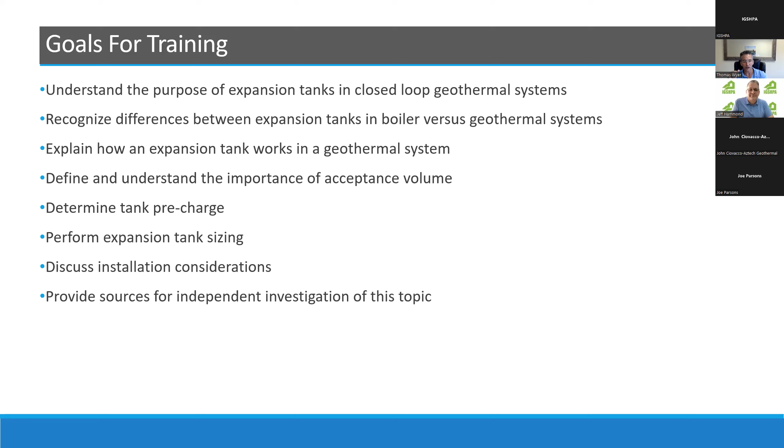So what I'm going to cover today is hopefully everything you would want to know about expansion tanks for use specifically in closed loop geothermal systems. I'm going to focus on diaphragm tanks. Also, you can consider bladder tanks as part of that category. I'm not going to talk about compression tanks that have an open air water interface. I'm going to talk about how to size these tanks, how they work in a geothermal system, and where you install them in a system. So pretty much everything that you could consider for expansion tanks. The last thing I want to do is also provide sources for you to investigate this topic for yourself.

In fact, the very first slide I put in here is the references that I've used in my research, both in creating the white paper itself and also in preparing for this presentation. A lot of these will be very familiar to you: the ASHRAE handbooks, the CSA IGSHPA standard C448, the Plastic Pipe Institute's excellent book on polyethylene pipe. If you're into any kind of hydronic heating, I would suggest Siegenthaler's book on modern hydronic heating. There's an excellent article that I'll reference in the presentation on understanding expansion tanks. It's an ASHRAE publication from 2003, authored by Taylor.

And again, I'm using some information that we wrote in our white paper, and I put a link in the presentation, so you can go back later on if you haven't read that paper and compare it to what I'm talking about today. Now, we created that paper many years ago, and as with anything else, when you continue learning and reading and doing further research, you look back at things you may have done earlier in your career and say, gosh, if I could explain that a little differently, I'd change this word, I may exclude this sentence. But I think that if you take a look at the white paper and also pay attention to the presentation today, and maybe go back and follow through the presentation on your own time, I think IGSHPA always makes these available for everyone offline after the presentation, and I can include a link on our website as well. If you compare that information, I think you'll get a pretty good overview of expansion tanks in geo.

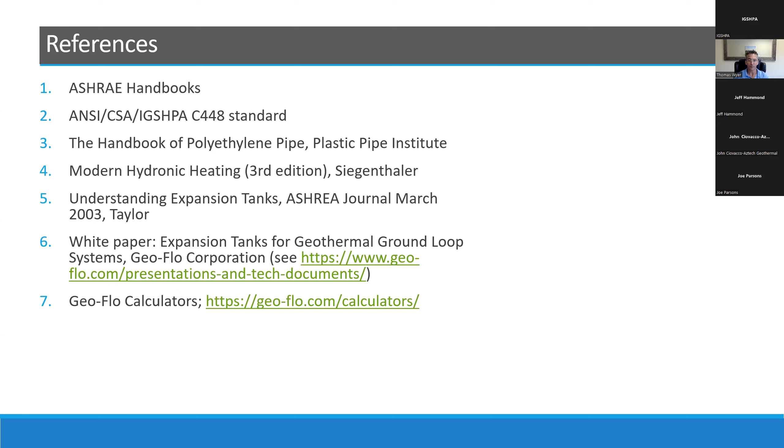And finally, I reference calculators, and as Jeff mentioned, full disclosure, I do work for Geo-Flo Corporation. We produce these calculators and we manufacture some products for this industry, so that's full disclosure on that. However, you won't see any product advertising during the presentation. This is purely a technical presentation. You'll see that very shortly.

So why do we use an expansion tank in geothermal systems in the first place? If you have been in this industry and done installations and service on geothermal systems, you'll know that the system pressure varies from season to season.

In fact, it has the highest pressure in the winter and the lowest pressure in the summer, typically. The reason for that is that the HDPE pipe itself expands and contracts at a higher rate than the fluid itself. So as water warms, it expands, and as it cools, it contracts. And HDPE pipe does just the opposite. As it warms up, it expands. It doesn't do the opposite. It expands more quickly than the fluid itself, and it contracts more quickly than the fluid itself. So that creates a situation where we see these pressures varying over the seasons and having high pressure in the winter and the lowest in the summer.

The other thing that we have to keep in mind is the HDPE pipe itself has viscoelastic and stress relaxation properties. So basically what viscoelastic means is that it functions kind of like taffy. So it has viscous properties and elastic properties. And like taffy, if you stretch it, it kind of pulls back a little bit, but it doesn't snap all the way back. That's the way HDPE pipe is. And stress relaxation basically means that the stress developed in the material degrades over time. So given enough time, the stress level approaches an equilibrium state. So those two properties of the pipe itself lead to a decrease in system pressure over time.

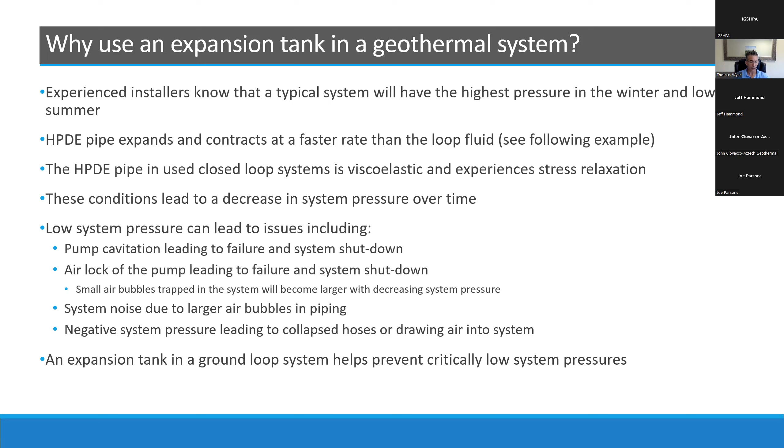So we could actually take a look at this concept of the pipe expanding more than the volume. And what I've done here is included some formulas. I'm not going to go through every single variable, but I want to point out a few things. One, we're assuming that the volumetric change of the pipe with these formulas, the pipe itself is unrestrained, which means that there's nothing holding the pipe in place.

That leads to a conservative estimate of the linear expansion and the diameter expansion, the volumetric expansion of the pipe itself. Now, if you read into the Plastic Pipe Institute, what they say about the linear expansion of pipe, that the actual value is much less than theoretical value. And they suggest that field experience shows that it may be even up to half. But they indicate, as well as most engineers that you work with, you have to still design toward the unrestrained condition because that's the most conservative case. That's the most conservative estimate of the changing length, diameter, and therefore volume of the pipe.

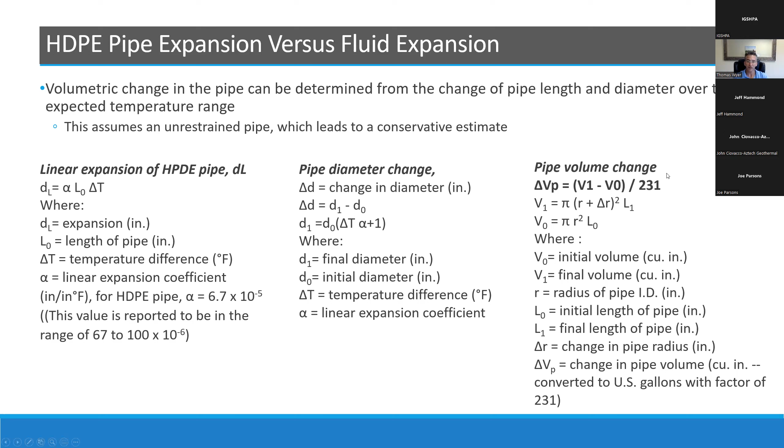So you can use these formulas to figure out the increase in volume of the pipe. And you can compare that to the volumetric change in the fluid. This is one expression or one formula that you can use for finding the change of volume of a particular fluid.

It gives you the values here. This is not the only formula, by the way, that you can use—this is just one version of it. Once we calculate the pipe volume change and the fluid volume change, we can compare those numbers. I think the best way to do that is take a look at an example.

I picked this example because I'm looking at a surface water condition, or a lake loop or pond loop with a heat exchanger in it. The reason I picked a pond loop or lake loop is because it is very close to an unconstrained condition—there's no soil or rock holding the pipe in place. You could also think about a slinky mat on the bottom of a lake or pond as being a condition where the pipe is fairly unrestrained. So I picked this example for that particular reason.

So just very basic, we've got 3,600 feet of 3/4 inch pipe, and just 12 of these 300-foot spaced coils. We expect the temperature range from 40 to 90, and we're using water.

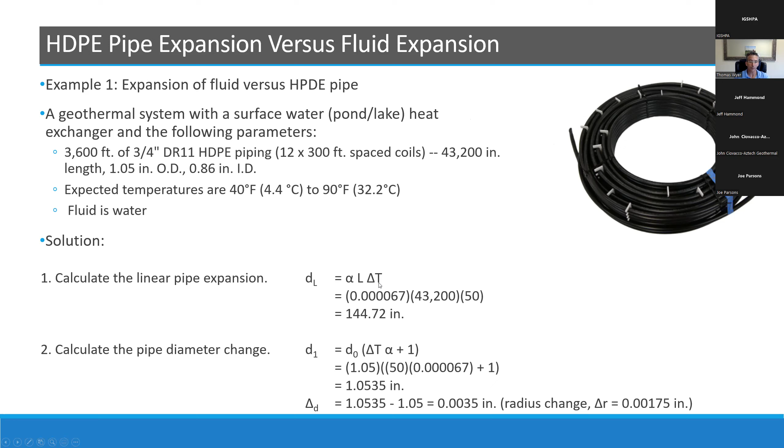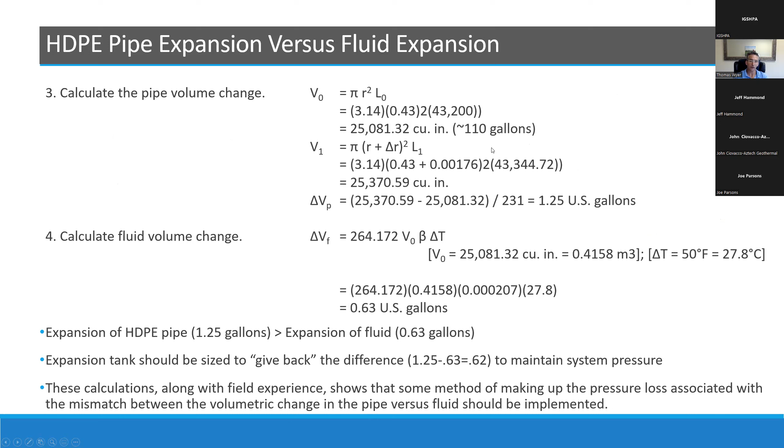In this example, we can calculate the change in the length, how much that pipe is going to change. 43,000 inches of pipe will change about 144 inches. Then we can calculate the diameter change of the pipe, crunch through all this stuff. We can figure out what the initial volume of my lake loop is in this case—it's about 110 gallons. Then we can calculate the change in the pipe itself: this pipe will change in volume by 1.25 gallons over 110 gallons, so it's going to increase by 1.25 gallons in that temperature range.

The temperature range again was 40 degrees to 90 degrees. The fluid volume is going to change by 0.63 gallons. So this shows you that the pipe itself is expanding greater than the expansion of the fluid, which is exactly what we find in practice. So we know that happens in practice. Therefore, the expansion tank should be sized to give back to the loop the difference between the expansion in the volume of the pipe and the expansion in the volume of the fluid. And if you do that, you can maintain system pressure.

So really, I just picked this to illustrate what we know sort of anecdotally: that the pipe expands more than the fluid and the system pressure drops. I wanted to put some numbers behind that for you to really take a look at it. So by looking at these calculations and with field experience, we know that we need some method of making up that pressure loss because there's a mismatch between the volume of the pipe and the volume of the fluid changes.

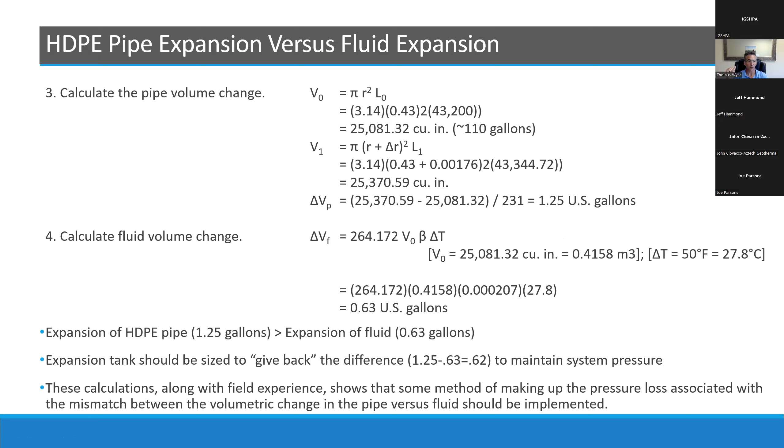So the current ANSI CSA IGSHPA C448 standard also makes mention of expansion tanks in systems. The standard recognizes that in a pressurized system, you are going to have these pressure losses. You're going to have to maintain that system pressure so that you don't have problems with the circulator, or as I mentioned earlier, problems with air in the system or the system dropping below atmospheric pressure.

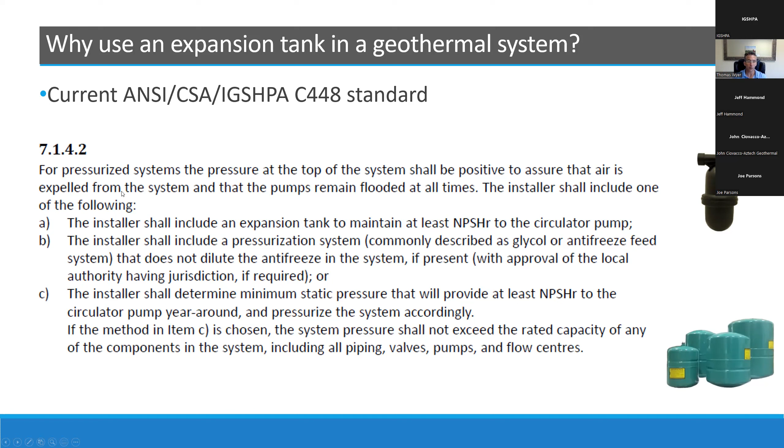So they suggest that you install an expansion tank—that's one way of doing it. You can also install a pressurization system, like a glycol feed system, or the provision number 3 was provided to allow people to do what a lot of folks in the industry have done for years, which is pressurize the system to a really high value with your flush cart at the beginning of installation and hope that is enough to maintain that minimum static pressure over the course of the year. It may not be the best provision, but it does allow you to keep doing what you've been doing. However, using an expansion tank will put you in a position where you don't have to concern yourself as much about figuring out what that minimum static pressure needs to be. So I just wanted to point that out because the standard does suggest that we should do something like installing an expansion tank.

I also wanted to look at this because a lot of folks who do geo also do hydronics. So I wanted to take a look at the differences between expansion tanks in boiler systems or traditional hydronic systems and geothermal systems. In a hydronic system, a boiler is hooked to some rigid piping like copper, and that piping expands and contracts very little over the operating range, but the fluid does—it still expands quite a bit going from a cold temperature up to a hot temperature to condition the space. If you don't include an expansion tank, then that fluid's going to expand quite a bit faster than that rigid piping, causing really dangerous increases in pressure. You could have something like a bomb in your basement.

Boiler systems typically also include pressure relief valves to prevent those dangerous overpressurization conditions. We are not usually installing those in geothermal systems on earth loops. We don't usually include pressure relief valves. In a boiler system, you size the tank to prevent these system overpressurization conditions so things aren't dangerous. You have to make the tank big enough so that water doesn't come squirting out of the pressure relief valve.

And you also want to make sure the tank is appropriately sized so that as the system pressure increases, it stays below all of the rated components that are installed in that system. As I mentioned previously, the point of an expansion tank in a geosystem is typically to prevent low system pressure. The reason we're more concerned with low system pressure than overpressurization is that

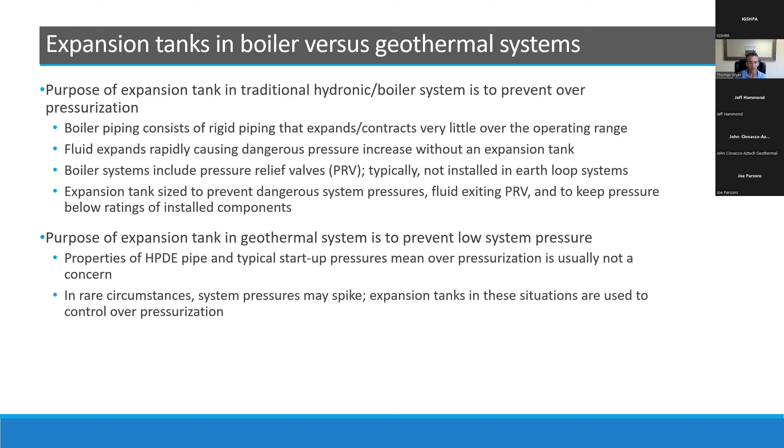Okay, how does the expansion tank actually work in a geothermal system? Well, we know that the loop pressure is highest when the loop temperature is the coldest, which is in heating season, and lowest when the temperature in the loop is the highest. So what we see here in this little example is that in a bladder tank, when the loop is warm, all of the fluid is pushed into the loop, and on a cold loop, as the fluid contracts, it is driven into the tank and increases the pressure on the inside of the tank. The amount of water that this actually holds is something called the acceptance volume. We're going to talk a lot more about acceptance volume in the next few slides.

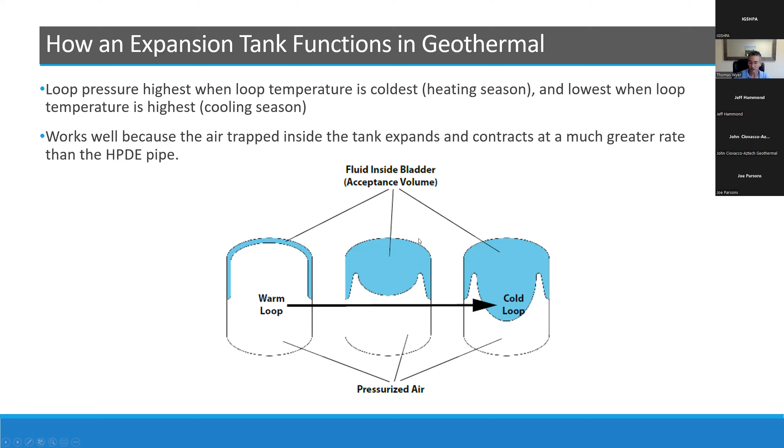And that pre-charge pressure is typically when the bladder itself is extended fully inside of the tank, taking the shape of the tank. In a boiler system, that pre-charge is set at a cool temperature, so the tank actually starts to function as the fluid warms. So that's the way the pre-charge is set for a boiler system. It's to allow the tank to start functioning at that pre-charge pressure.

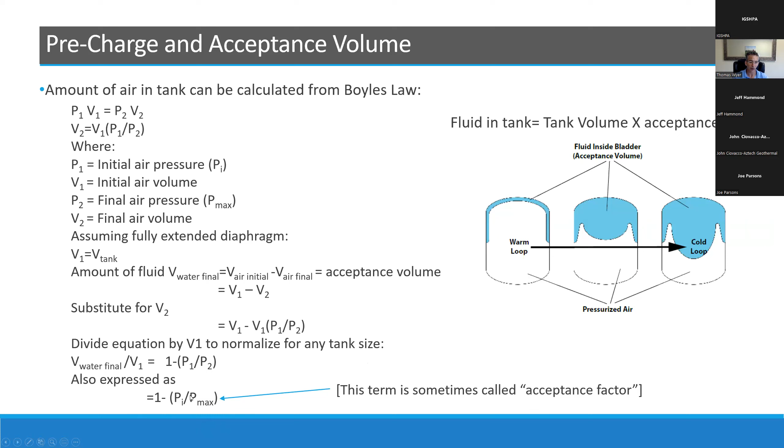So how do we size the tank? Well, we know a couple of things. If we start out with too small of an acceptance volume, then it's not going to be that helpful. We saw in that chart that if the acceptance volume is not correct, which means I've either got too small of a tank or I've got the wrong pre-charge, then the tank is not going to do anything to help me prevent low system pressure. If you use a larger tank than you need, it's not going to cause problems. The only problems you're going to get into are a slightly higher installation cost, which shouldn't usually be that big of a deal because the tanks are relatively inexpensive compared to the system cost, and they require a little bit more mechanical room if you have a bigger tank. So there's a space consideration.

Now, what you need to do when you're sizing expansion tanks is to figure out what your total acceptance volume is, and it needs to be greater than the expansion of the pipe over that expected temperature range. I want to point out also that you can use 2 small tanks instead of 1 large one. That's perfectly acceptable. Just to reiterate the issue with boilers versus geo: acceptance volume in a boiler system has to be greater than the fluid expansion. Acceptance volume in the ground loop system has to be greater than the pipe expansion.

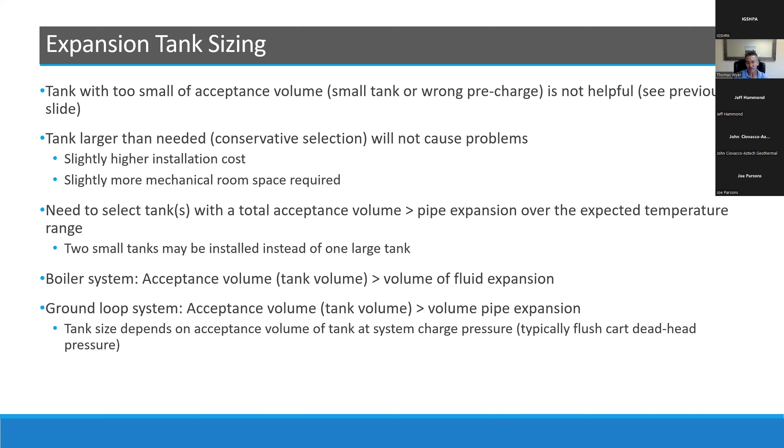So the tank size depends on the acceptance volume of the tank at the system charge pressure. And that system pre-charge pressure is usually dictated by the deadhead pressure of your flush cart.

So now we get into the nitty gritty. How do we actually use all the values that we have to figure out what tank size we need?

Well, the Ashrae handbook does give us a guide, and we're going to dissect this a little bit. If you've sized expansion tanks before, you've probably looked at the Ashrae formula. It's the one that's most probably well known.

A couple things I want to point out: the linear coefficient of expansion on rigid piping like steel is a lot less than the expansion of HDPE, by a factor of 10. So the expansion coefficient for something like steel piping is 6.6 times 10 to the negative 6, whereas HDPE is going to be somewhere like 67, maybe 100.

Now, Taylor does a couple of things. One, he explicitly says that the pressures in the denominator are the initial pressure of the expansion tank, the pre-charge pressure, in other words, and the maximum system pressure that tank would see. That's a little bit different than the Ashrae formula.

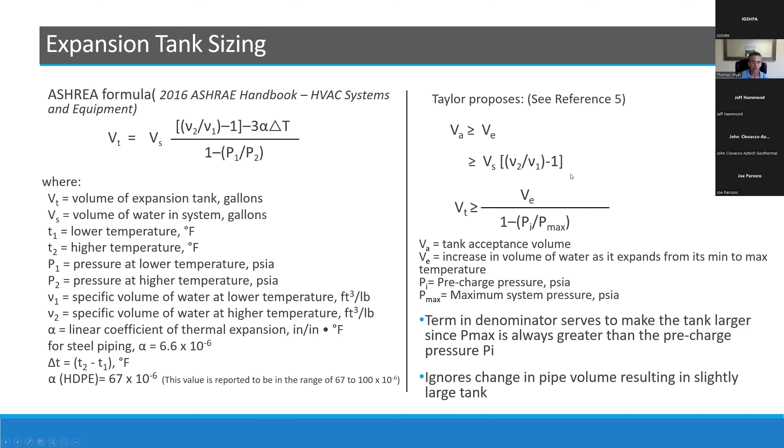Okay, I think the best way to take a look at this is to look at an example. So...

What we're going to do is take a look at a system that's got 100 gallons of fluid. It's using all HDPE piping. We want to keep a minimum static pressure of 12 on the system, and we're going to pressurize this thing at the beginning with our flush cart up to 50 psi.

We've designed the ground loop to have a minimum temperature of 35 and a maximum of 85. So we could take these numbers, plug them into our Ashrae formula, and then take a look at the result.

So this first term that we have here, this is the relative volume change in the fluid. If I take the initial volume, which is V sub S, the initial 100 gallons of fluid, and multiply it by the ratio of the specific volumes of the fluid at the lower and higher temperatures, what I see is that the fluid's going to expand 0.44 gallons over that range, okay?

If I look at the expansion of my pipe over that same temperature range, so that's my initial volume times this factor, I see that my pipe once again expands a lot more than my fluid. So if I subtract those two values, this one from this one, I get negative 0.57 gallons.

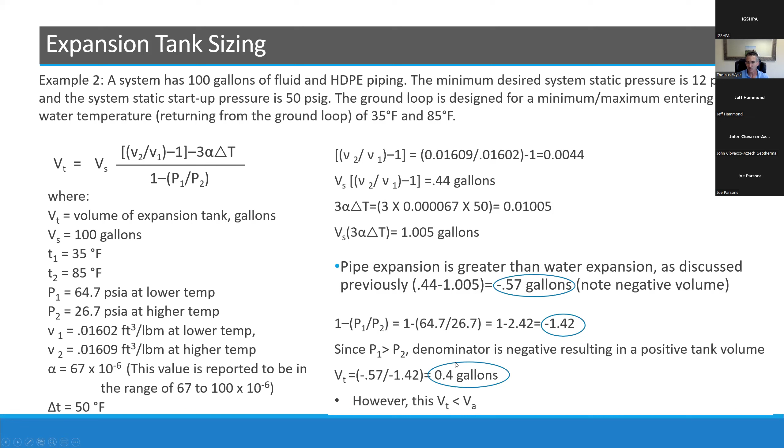So what if we flip P1 and P2 like Taylor proposes? So instead of using the lower pressure temperature ratio that we have from the ASHRAE formula, we flip those two numbers, okay? And when we do that, we get a 0.59, and we could then take our previous value of negative 0.57 divided by 0.59, but then we get a negative answer on our tank size. You can't have a negative tank size. So that creates some additional confusion. What do we do? Do we take the absolute value of this 0.97 and say that's the tank size we should use, or what? I mean, what do we do?

Now, if we look at all the other stuff that I've presented so far in the presentation, it turns out that you can have a 0.97 gallon tank. And we'll just round that to 1, because you could probably buy commercially a 1 gallon tank. That will actually accept 0.59 gallons of fluid when it's pressurized to 50 psi with a 12 psi precharge. So as we saw earlier in the presentation, the acceptance volume of the tank is going to be the tank size times that acceptance factor, which, as it turns out, is Pi divided by P max, as Taylor proposed. And that gives us a positive 0.59 gallons.

Okay, so this work indicates that what we should be doing, and it follows logic, is that if we rearrange the ASHRAE formula, then we can size our tank based on the minimum fluid pressure that we want in the system. So all we have to do is recognize that the expansion of our pipe is greater than the expansion of our fluid, subtract those two values, and divide that by the acceptance factor, or the amount of air side that you need inside your expansion tank, to determine your tank volume.

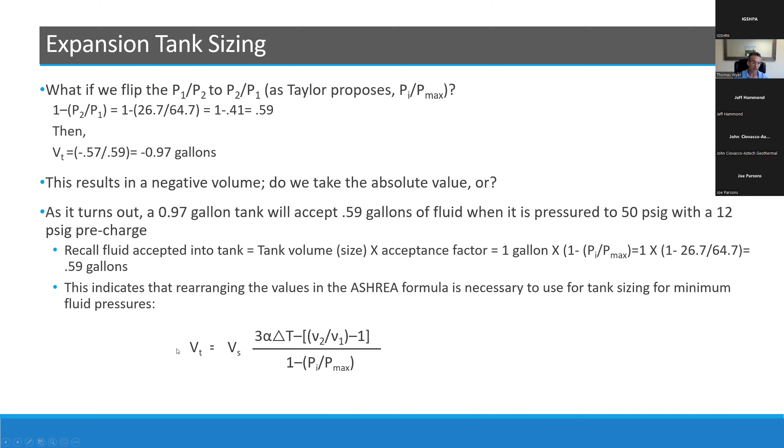Okay. So what am I saying about the ASHRAE formula? It's been used a long time by engineers, so it definitely works. All right, it's valid for boiler systems and geosystems to prevent overpressurization, but you have to understand what the purpose of the ASHRAE formula is. And I would suggest exercising caution when using the formula as printed for maintaining minimum loop pressures, particularly in loops that are unrestrained. Right? If you've used the ASHRAE formula and you've had good results, it's because there's a lot of conservative measures built into that, because we are assuming unrestrained loops, unrestrained expansion and contraction of the piping. So if you've used it and it's worked, that's why.

But if you dig into the numbers, you'll see that when you take an acceptance factor as it's printed from the ASHRAE formula, it actually results in a smaller tank size than you would expect. Taylor's approach of ignoring the pipe expansion is more conservative for overpressurization, but again, it's not really applicable for underpressurization or expansion of HDPE pipe. So the correct approach is to compare the volumetric expansion of the HDPE pipe to the volumetric expansion of the fluid, and make sure you pick a big enough tank that will have enough capacity to maintain the desired loop pressures.

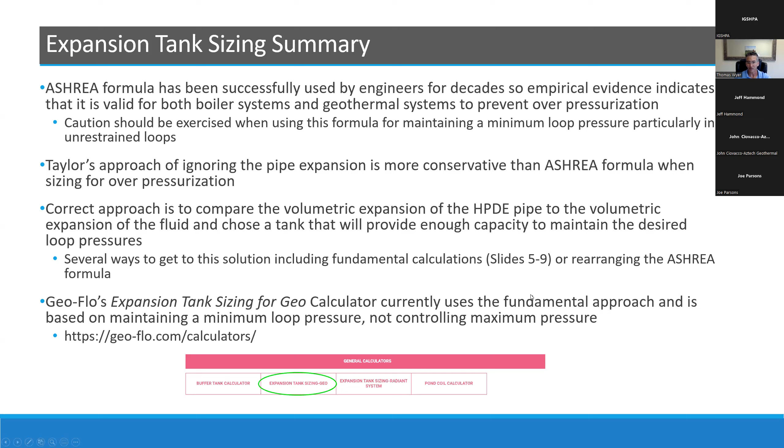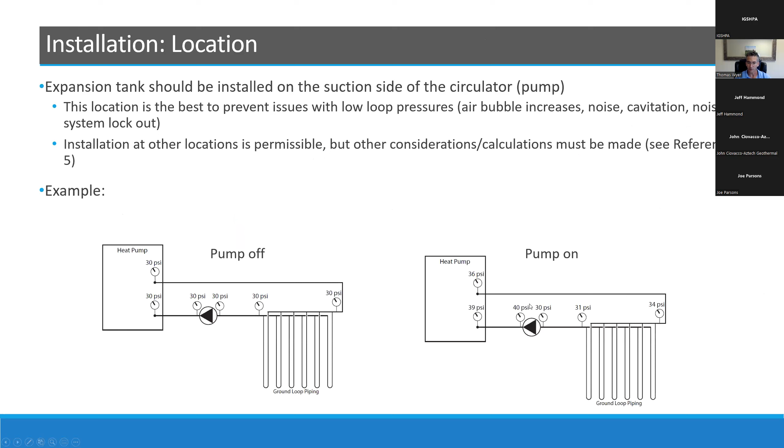I've got 30 psi on the air side, 30 psi static throughout my loop, assuming no elevation changes. If I turn my pump on and have this isolation valve closed, the discharge pressure jumps up to 40. We saw that previously with no expansion tanks. We know when the pump turns on, the pressure in the pipe right at the discharge of the pump is going to increase.

It's going to increase to match the head loss around the loop. Now, if that pump is on and we open the valve to the expansion tank, what happens? A tiny bit of fluid will go into the expansion tank, and that pressure will increase inside the expansion tank. I've rounded to 30, but if you do the math, it'd be like 30.01 or something very small. So a little bit of fluid's going to go into the tank to equalize the pressure on the air side of the system side, and then you lose pressure all the way around. So now my suction pressure is only 20 psi instead of 30 psi. Again, in this case, not too big of a deal.

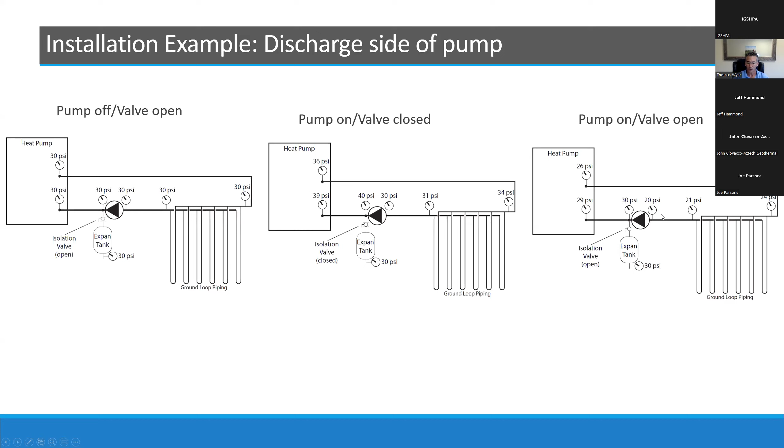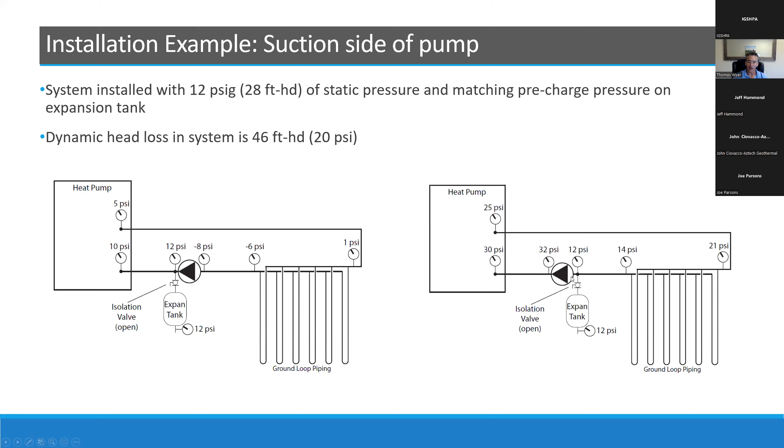If you move that expansion tank to the suction side of the circulator, when the pump turns on, the full 20 psi or 46 feet of head differential goes around the loop, and now my suction pressure is 12. So I'm maintaining positive pressure on the suction side of my circulator. This illustrates why you need to put your expansion tank on the suction side of a circulator. It's the safest place to put it.

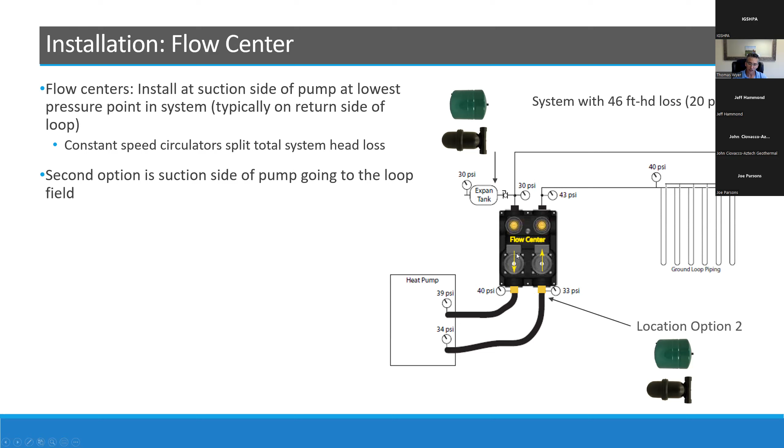What happens if you install a flow center in a residential location? Where do you put it then? Well, that's a little bit tougher because these circulators are push-pull—this one's pushing through the system, this one's pulling through the system. The best place to put it is at the lowest pressure point in the system, which is typically on the return side of your ground loop, usually here. If you don't want to install it there because you're doing a retrofit, or because you want isolation between your three-way valves and your flow center and your ground loop, the second best place would be at the suction side of the circulator going back out to the loop. So those are the two locations if you're installing in a traditional residential application with the flow center. But importantly, try to always put your expansion tank on the suction side of a circulator at the lowest pressure drop point in the system.

Some other considerations you want to think about. A lot of times people stopped using expansion tanks historically because they would condense, get cold from the cold fluid, rust, leak, and cause a leak point—that's a problem. All you need to do is install some kind of thermal break between the installation point of your expansion tank and the plumb-in point of the system. You can do that in a whole host of ways, but definitely put a thermal break in there if you're using a steel expansion tank, so you don't have it sweating, rusting, failing, and causing additional problems.

Always include an isolation valve so that you can shut off the tank—for service, and also for installation. And keep in mind, you can use two expansion tanks instead of one.

Two small expansion tanks will have the acceptance volume of one larger one. Connect them at the same point.

If you start connecting expansion tanks in different spots around the building, you're going to have to do a lot of work to figure out what those pressures are going to be throughout the building. There are HDPE tees commercially available that allow you to fuse the tee into the HDPE piping system, and have some metallic port that you can thread in an adapter to connect your expansion tank.

It's typically a good idea to install your expansion tank with the discharge side of the tank up, so if there's any air inside the tank, it just flows out into the system during startup.

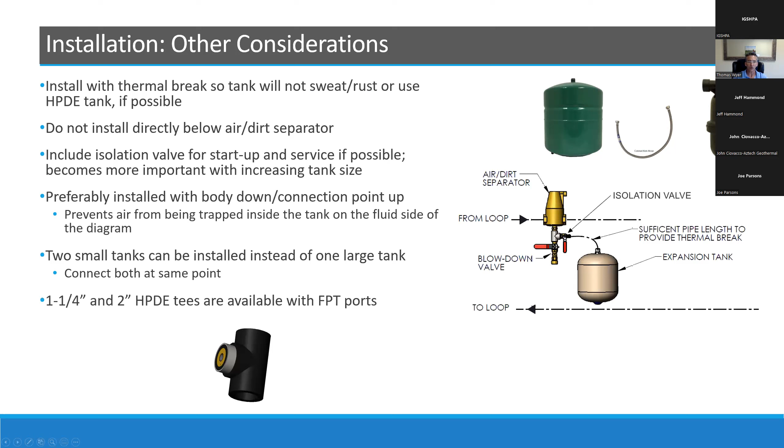Okay, last thing, how do we start up a system with an expansion tank? Well first, set your precharge, if applicable. Some tanks, like this little one here, this is an HDPE tank, do not have a Schrader valve to set a precharge. It's factory precharged at a fairly low level, which basically assumes that this thing has very little elevation head or water column on the plumb-in point of that particular device. This one's HDPE, so it won't sweat or cause issues with failure over time. So starting up, we're going to set our precharge.

If you have a Schrader valve, you can set your precharge on it. Fill the system with the isolation valve open, so any air inside of it, the buoyant force of the air will push it into the piping system, so you can flush that air out.

Then close your isolation valve, flush your system. So now I've got no air in my tank, I've got no air inside of my loop. Then you deadhead your flush cart like you always do to check for air in the system.

If you do not have an isolation valve here, when you deadhead your flush cart, it's going to force fluid into the tank, and the water level inside of your flush cart is going to drop, and it's going to look like there's air in the system. So you need to account for that, either by having this isolation valve or understanding that when you deadhead your flush cart, there's going to be some fluid that gets pressed into your tank.

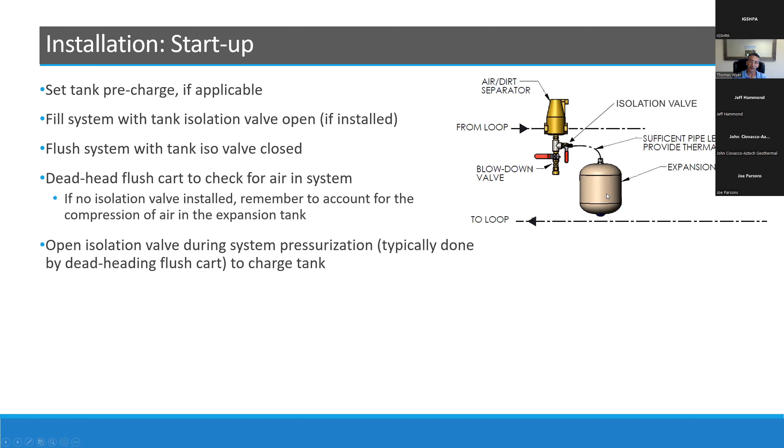If it's a very small tank, like a little 3/4 inch tank, there's going to be very little water that gets pushed into there, so it may not affect the water level drop in your flush cart by much, but please keep an eye on that. Once that's done, you'll open up the isolation valve and pressurize your system, which charges the tank. So now I've got a tank full of fluid that has pressure on the air side, and that fluid's ready to be pushed back into the loop as the loop pressure falls.

There's a lot of information there. I've taken up most of my time. If you've got questions, I'm always welcome to stick around longer than the presentation scheduled to answer those. Otherwise, I'll turn this back over to Jeff.

Thank you, Tom, great presentation. And I guess our challenge for the weekend is to try to use viscoelastic in a sentence at this point.

I don't see any questions in the chat. We'll give everybody just a couple of minutes. It's about 28 past the hour, so we have a little bit of time. If you would type in your question. Oh, there's a gentleman with his hand raised. Jacob, if you want to state your question.

Sure, thanks for that, Thomas, that was great. One thing you mentioned, obviously for a geosystem, we're trying to overcome low system pressure, which means that the expansion tank would be pushing pressure back into the system. But you said to set the precharge as low as possible. Wouldn't you want the tank to be at a higher pressure so that it has capacity to push into the system? I'm a little bit confused, wouldn't the tank just, if the system pressure dropped, wouldn't it just drop to zero?

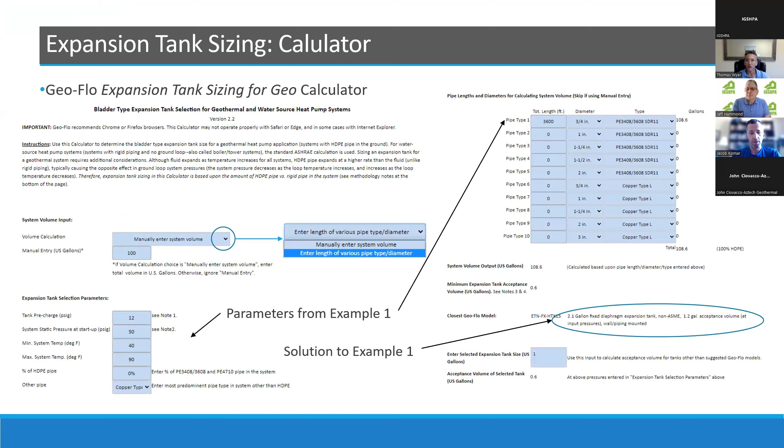Right. Okay, so the pre-charge might be at 12, but you deadhead it to 50, correct? Yeah, and okay, that makes sense. So if you're at 12 and you deadhead to 50, well, in this particular 2-gallon tank, you've got almost 1.2 gallons of fluid to give back to the system.

So as the system drops, as your loop pipe expands and relaxes from the stress relaxation, that fluid will go back into the loop all the way to the point where it reaches the pre-charge. So at the point of the pre-charge, it's not pushing any more water back in because there's no more water in the tank. So if you can make that pre-charge as low as you possibly can, it'll continue operating down basically to that pre-charge pressure.

Yeah, that makes sense. And so for a commercial tank, which are typically at 12, can you drop them to 0, or would you want to? You would drop them to match the piping height above the installation point. So say you've got a 1-story building and all of the pipe is in the mechanical room, and you install the expansion tank, let's say on the floor, just to make it easy. And your pipe goes 1 foot up the wall. So that means you've got less than a half PSI on your tank. So that means you can drain the air out of that tank down to 1 PSI or basically to nothing.

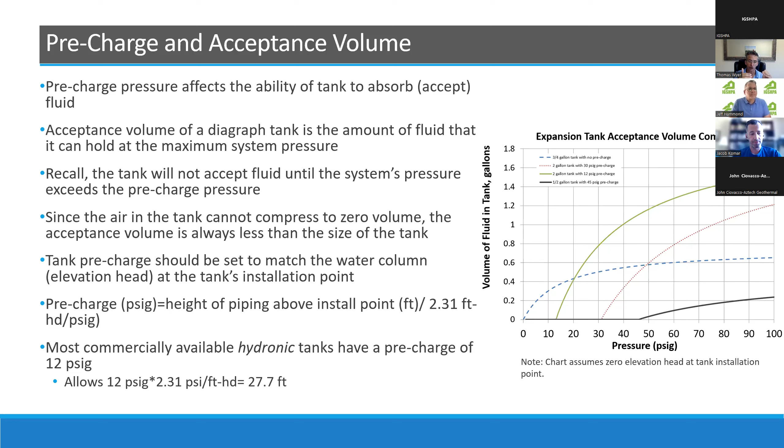Kent asks, won't deadheading the pressure tank stress the bladder? No, and that's the beauty of bladder tanks. The bladder itself conforms to the inside shape of the tank. I think this is a pretty good slide to show it. As you're forcing fluid into the tank, the pressure on the water side is equal to the pressure on the air side, right? So the bladder itself is not really being stretched. It's just folding to conform to the inside of the tank. It's not like you're stretching that bladder, because the air side and the fluid side always have the same pressure.

Thank you, Tom. Do you have time for one more question? John has a question about non-pressurized systems. Yeah, sure. I'm happy to. I'll stick around all day. I love this stuff.

What percentage of residential geosystems actually use an expansion tank, and how does a non-pressurized flow center affect this need? So great question. I don't know that we have any data on how many residential applications use expansion tanks. I know there's a lot of contractors who have started using expansion tanks over the years. I know that at least one manufacturer includes expansion tanks in some of their heat pumps. So I would say that the number of expansion tanks in pressurized systems has grown over the years. It's probably much higher now than it was, say, 10 or 15 years ago when I first got into this business. So the number is actually growing because people have recognized the need to use an expansion tank in a ground loop system.